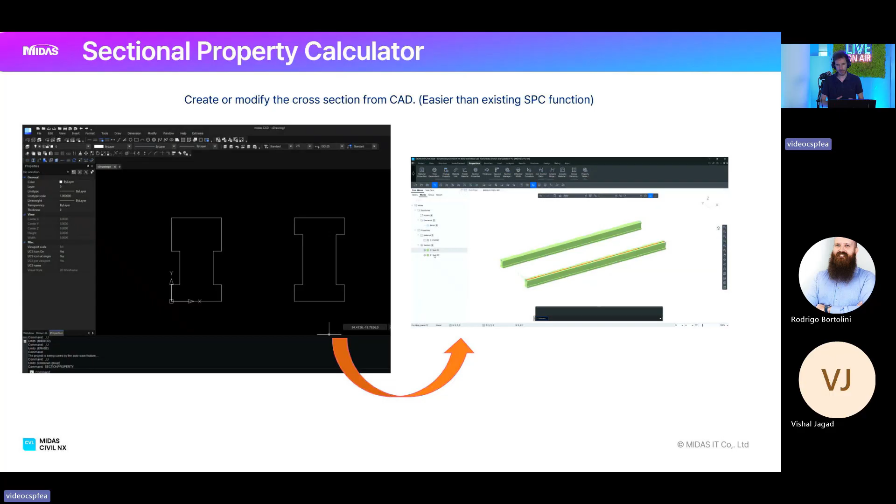Per esempio, qui disegniamo due sagome, e si possono calcolare le proprietà meccaniche di queste due sagome in questo strumento attraverso un comando che si chiama Sectional Property Calculator. Si calcolano le proprietà meccaniche delle sezioni, si abbinano a due o più elementi BIM di Civil NX connettendoli tra di loro.

E poi se noi aggiorniamo queste forme, quindi in CAD aperto contemporaneamente cambiamo queste geometrie, contemporaneamente possiamo aggiornare le sezioni nel modello aperto in Civil NX. Molto interessante, molto, molto comodo.

E questa funzione funziona per le general section, concrete section, steel section, composite section e per le tapered section, quindi per tutte le tipologie di sezioni.

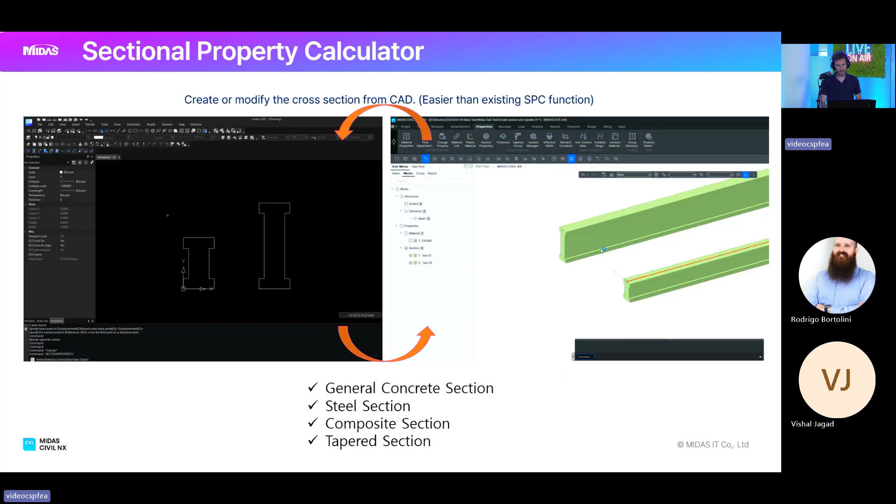Un'altra interessante novità è del nuovo GSD. È stata sviluppata la parte di precompressione, quindi è possibile introdurre dei cavi di precompressione sezionali. Sapete, il GSD è un verificatore sezionale di forme qualsiasi, e in più possiamo mettere i tendon, oltre che l'armatura.

Qui possiamo, adesso non c'è in questo disegno specifico, ma possiamo mettere sia l'armatura lenta che l'armatura di precompressione. L'armatura di precompressione ha le sue specifiche di materiale, ma in più ha anche il valore di precompressione, che possiamo introdurre completamente manualmente direttamente su GSD, oppure, essendo collegato a Civil NX, importiamo una sezione di Civil NX.

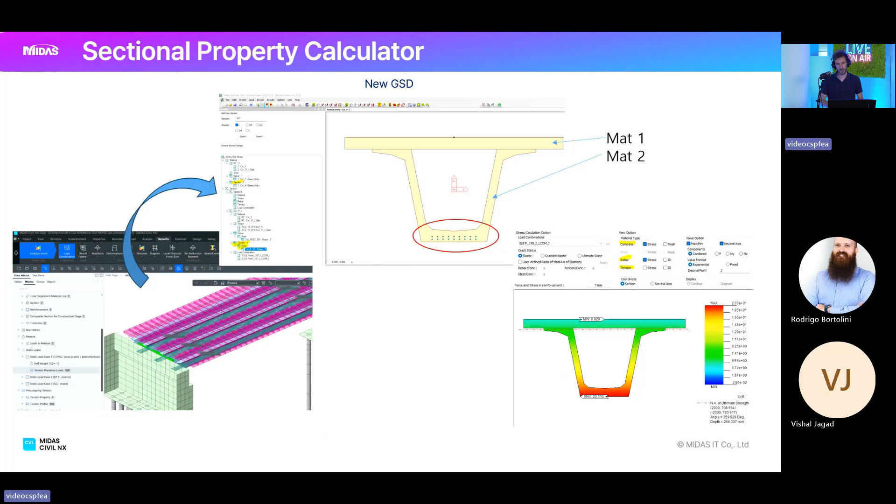In più, il nuovo GSD può sostenere due materiali concrete, quindi qui per esempio abbiamo un concrete per la trave e un concrete per la soletta, due materiali contemporaneamente presenti. È migliorato molto i tempi di soluzione delle verifiche, del check delle verifiche.

Come ho introdotto prima, sono migliorati i tempi in generale. Quelli del calcolo, essendo presente in questo momento ancora un solver tradizionale, i miglioramenti sono di circa il 10-15% nel calcolo, ma nella verifica sono migliorati molto di più.

Per esempio su questo test, dove c'è un modello scatolare a plate, non entro nei dettagli di quante combinazioni, carichi, eccetera, però diversi elementi plate con diverse combinazioni. Nel tradizionale Civil ci metteva 4 minuti, quasi 5 minuti, nel Civil NX 1 minuto e 38, quindi un miglioramento nei tempi di attesa del check molto migliorato.

Questo è molto interessante nel caso di verifiche di modelli a plate, però questo miglioramento dei tempi di design check è a 360 gradi, quindi anche sugli altri tipi di verifiche. Questo è un esempio che abbiamo preso perché è un tipico esempio dove i tempi si allungano molto, perché la quantità di elementi finiti in un modello a plate è di solito maggiore rispetto a un modello a frame.

Bene, adesso passiamo, fatta questa veloce introduzione, entriamo nel vivo della piattaforma API, sviluppata da Midas con una piattaforma di nuova generazione chiamata API REST, organizzata con un'interfaccia con il mondo della programmazione attraverso un formato chiamato JSON, che ha un formato di input e output con il quale poi si traduce nel modello di calcolo che tutti quanti conosciamo. Qui vediamo un esempio di interoperabilità con Python, Excel, VBA, Java, però oggi nello specifico vediamo una interoperabilità con Grasshopper.

First we will start with a brief introduction to what an API is and why it is important to use. We will discuss why Grasshopper is a fantastic tool for parametric modeling, and the main focus will be on integrating Midas Civil NX with Grasshopper.

So first is the synergy beyond Midas - what is the concept of data transfer with API? The first question that comes to mind is: what is API? API stands for Application Programming Interface. It is a set of specifications for a protocol that allows software applications to communicate and share data.

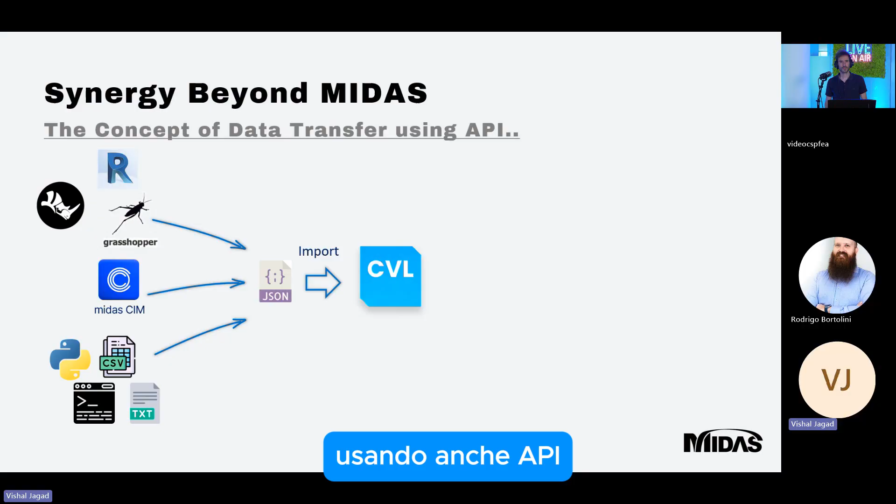In our case, Midas API allows us to communicate with platforms like Grasshopper, Excel, VBA, Python, Java with our Civil NX. So we can utilize the capabilities of different platforms with Civil NX, integrating different platforms using API. Also, we can export data from Civil NX to these platforms, so we can optimize the workflow accordingly.

So now the question comes: why do we need API? Till now we don't use API, and we are very comfortable without one. So why is this important now?

To answer that, let's see the challenges in bridge modeling. As a structural engineer, we know that initial planning and subsequent modification of a structure can be quite challenging. Sometimes we have to modify section dimensions, material properties, and bridge alignment. Implementing these changes can be quite challenging, requiring so much time and often repetitive work.

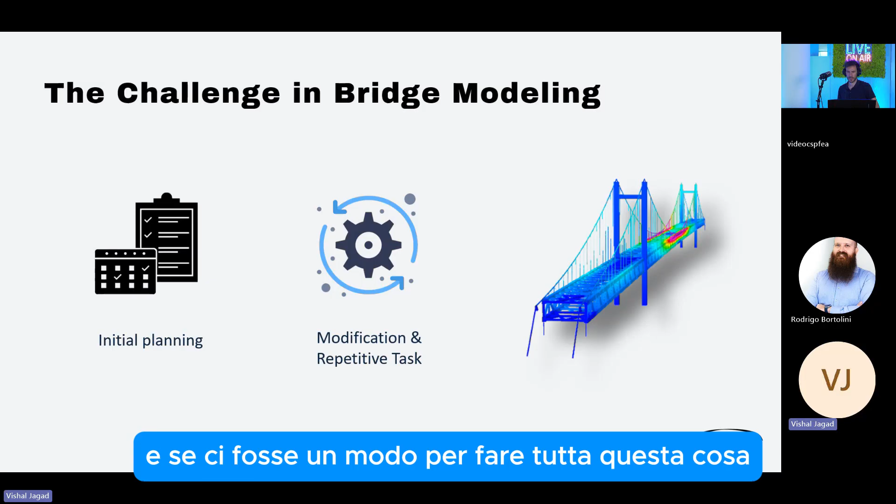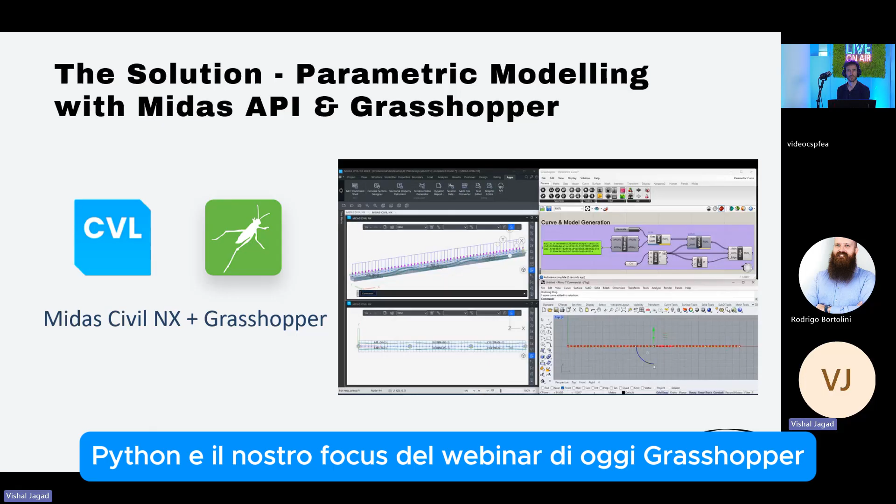So what if there is a way to make all these things far more flexible and efficient? That solution is Midas API. Using Midas API, we can seamlessly integrate Civil NX with different platforms like Excel, VBA, Python, and our focus of today's webinar, Grasshopper. This integration opens the door to parametric modeling and enhances overall productivity.

Let's see one video of how we can do that. In this video, we can modify the alignment very easily - we just have to modify it in Grasshopper and then implement that in Civil NX. With just a few clicks, we have updated the geometry. This is the example of how we can implement Grasshopper in Civil NX.

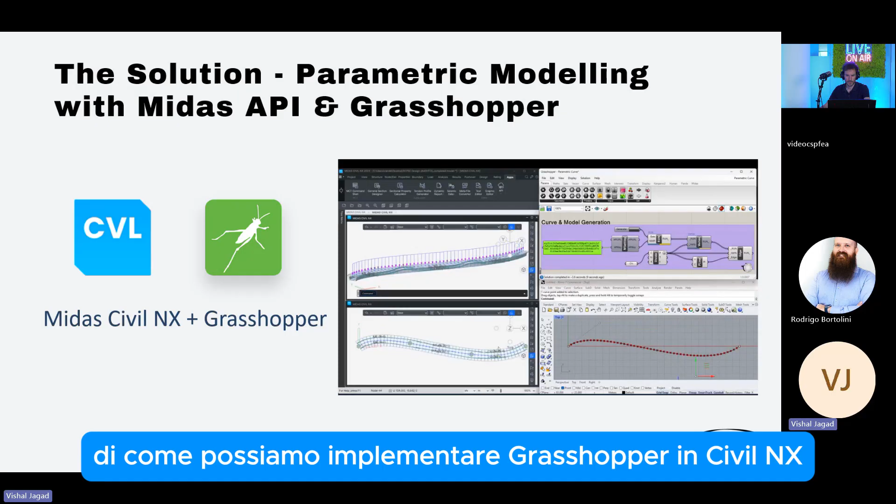So why Grasshopper? For those not familiar with Grasshopper, it is a visual programming tool built in Rhino 3D, popular in both architectural and structural engineering. It enables parametric modeling by letting users create geometry using logical relationships and adjustable parameters. This approach allows for rapid design iteration and real-time updates.

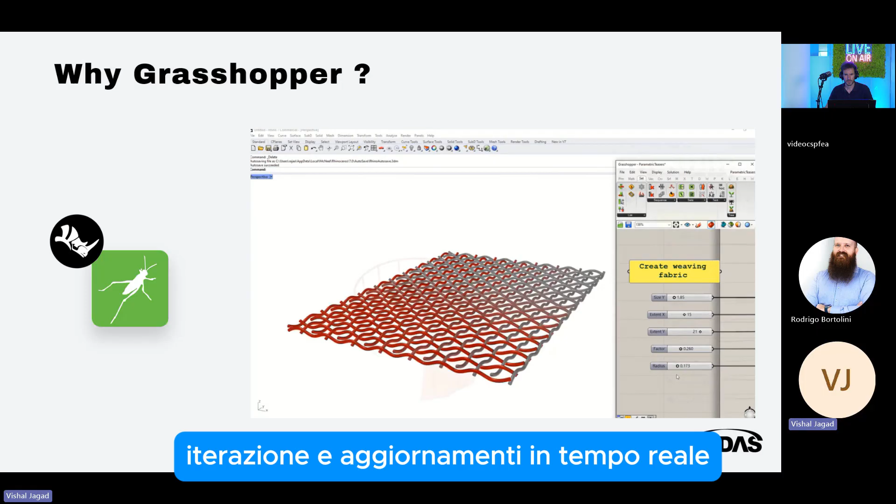So for simple or complex structures, we can create the structure in Grasshopper, and every parameter of that structure can be parameterized. We can see in this video that every parameter of the structure is parametric, so we can modify that in Grasshopper.

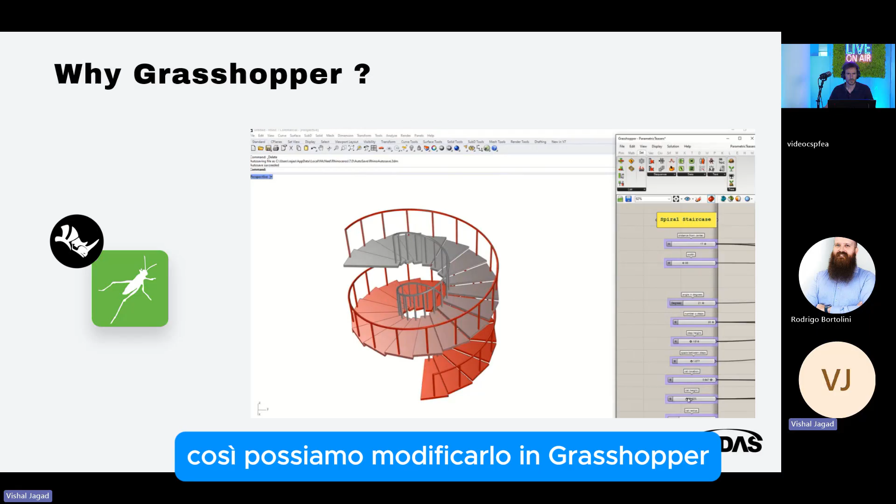Now let's see how we can use that to create a bridge structure. We will see the example of a truss structure - here is the truss bridge. We can modify the span of this bridge or the number of divisions of bracing, and also modify parameters like height or width. Each and every parameter we can increase or decrease. This is very useful when we have to make changes in our current bridge, and after modifying in Grasshopper, we can just create that bridge in Civil NX.

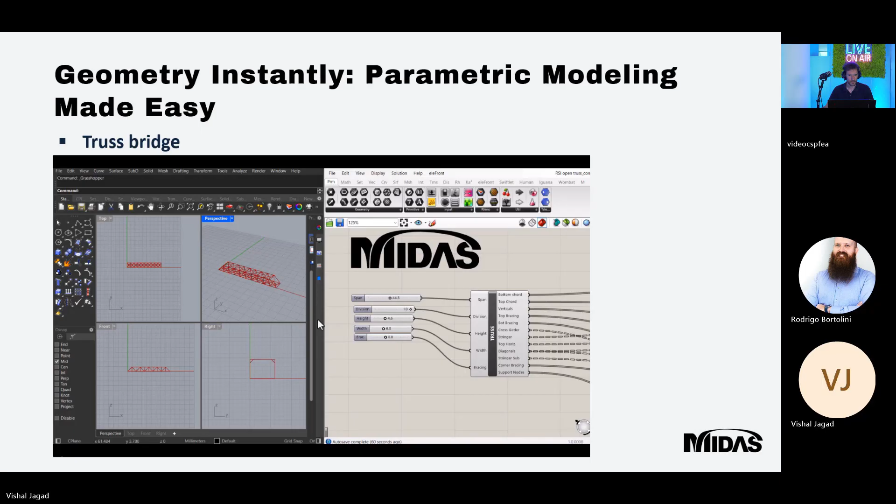Next example is of an arch bridge. We can see in this video that length we can increase, height also we can increase, and again width and number of divisions we can modify in Grasshopper itself. With just a few clicks, we have modified the full geometry of this structure. This is very useful when we have to make any changes in our existing structure - without it, we'd have to create the whole structure from scratch, which can take so much time. So this time can be utilized.

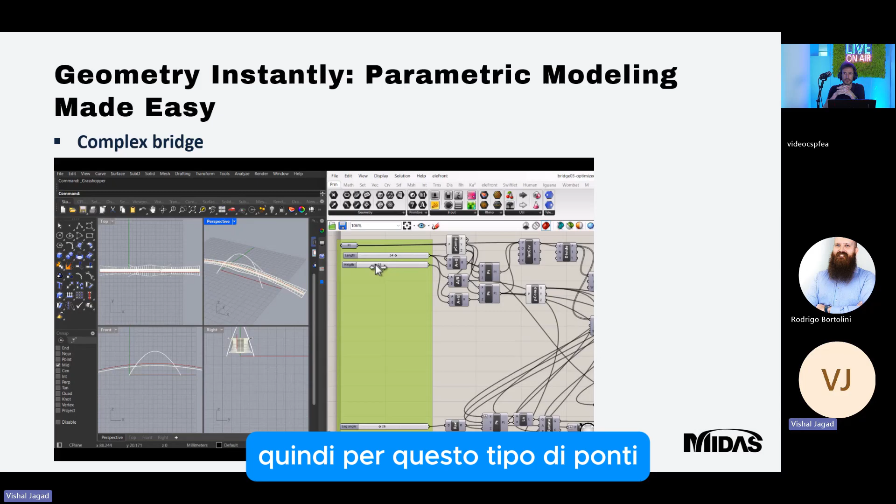Now, not just simple structures - in case of some structures where we have to implement so many dimensions, for example in this bridge, we can see there are so many dimensions such as length, height, and curvature. For this type of bridge, we can parameterize each and every dimension, such as angle or pipe diameter. We can see how easily we can modify the geometry without creating the structure from scratch - we can modify it in the existing Grasshopper file. Each and every parameter of this bridge can be modified, which is very useful when we have to test different types of geometry.

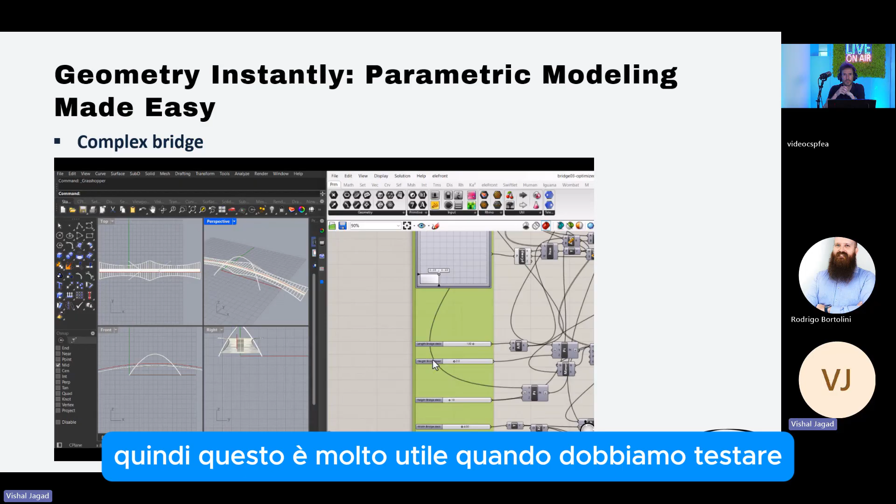So now let's see Midas plugin. To create the geometry that is created in Grasshopper, we have to use Midas plugin. Midas plugin is developed by Midas, officially available in the package manager of Rhino, and we can freely download it from there. After downloading it, we can see this type of tab in Grasshopper, the Midas tab.

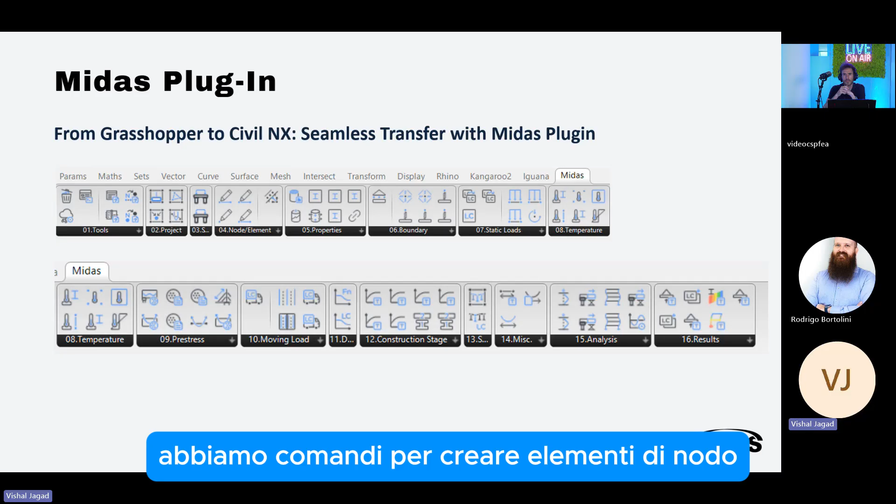In the Midas tab, we have all the tools available to create the bridge in Civil NX. For example, we have commands to create node elements, to apply boundary conditions, to apply static loads, and to apply construction stage and moving load, and to perform the analysis from Grasshopper itself into Civil NX, and also to extract the results from Civil NX. So all the necessary commands are available in the Midas plugin.

This command is arranged in a very systematic manner, same as available in Civil NX. For example, if you want to find the support, we can find it in the boundary command. And if you want to apply the self-weight, we can go into the static load and find that command. So this is very useful to find any command.

Now we will see one example of how we can create geometry in Civil NX using Grasshopper. First we will see how we can implement material, section, and create geometry, and also apply the support condition with this example. Let's see this video.

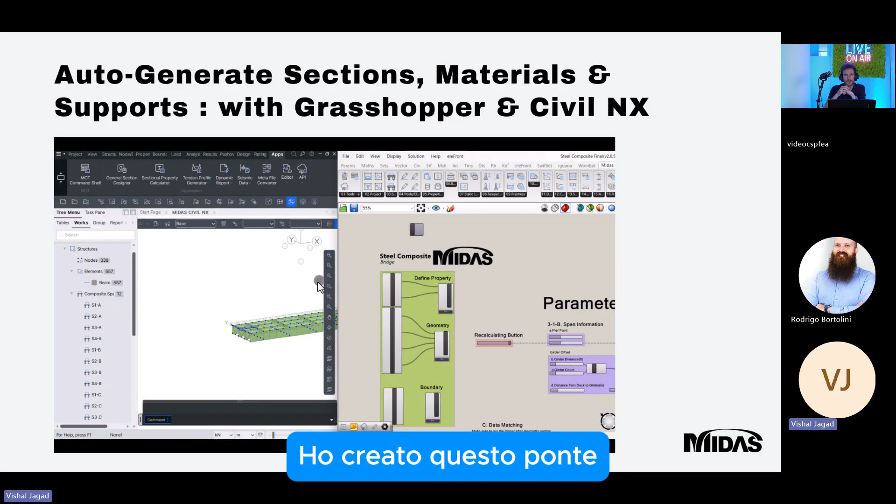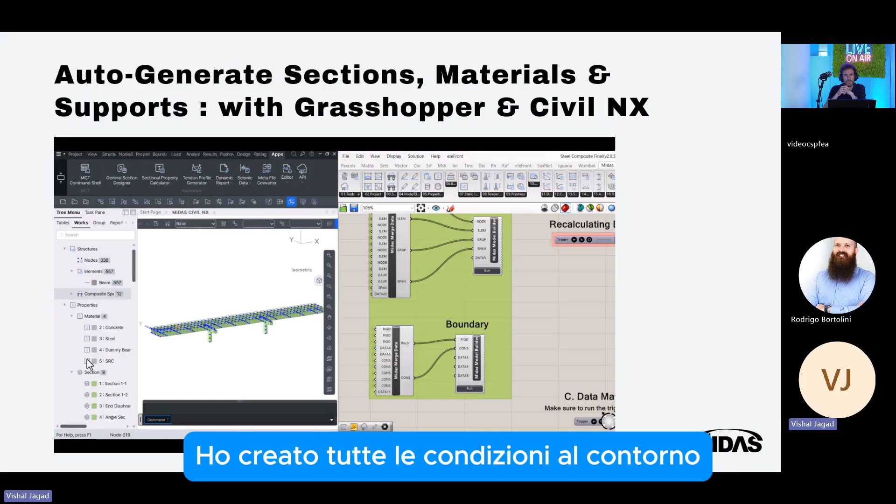With one click, I have created all the material and section. Then again, with just one click, I have created this bridge. Now I will implement rigid link and support conditions, and with one click, I have created all the boundary conditions, as we can see in this video.

So we have to create a Grasshopper template once, and then if we have any modification in the bridge, we can modify that in Grasshopper and run the command, and it will create the bridge in Civil NX. This is very useful in case of parametric modeling.

Now let's see an example of how to apply loads using Grasshopper. In this video, we can see that with one click, I have created material, section, and then geometry.

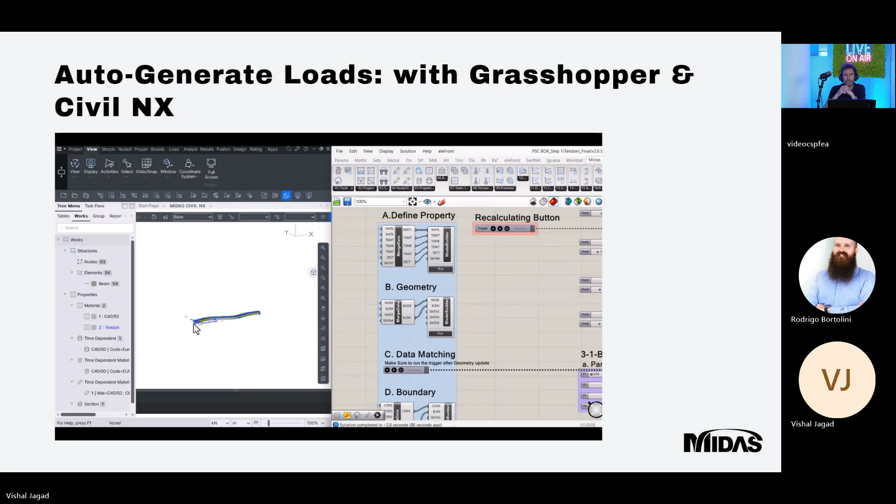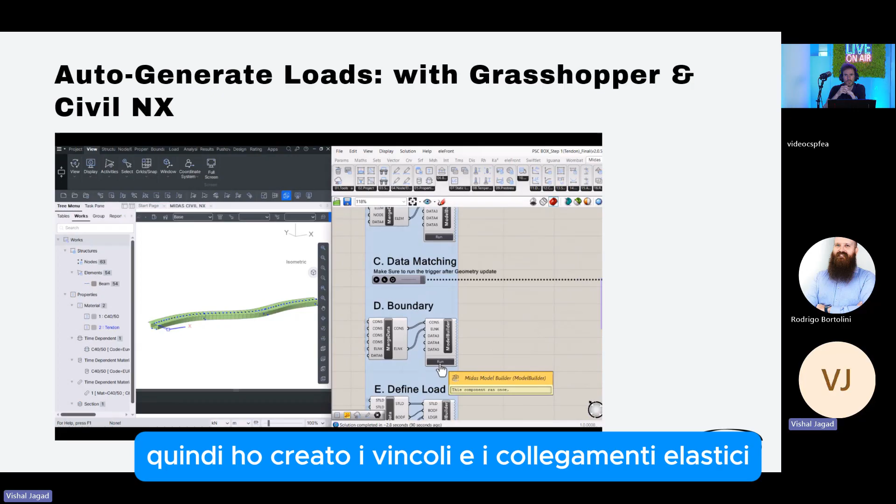Now I will apply boundary condition by executing this command. I have created the supports and elastic links. Now I just have to execute this command to define my static loads, and after defining it, I will assign it with one click.

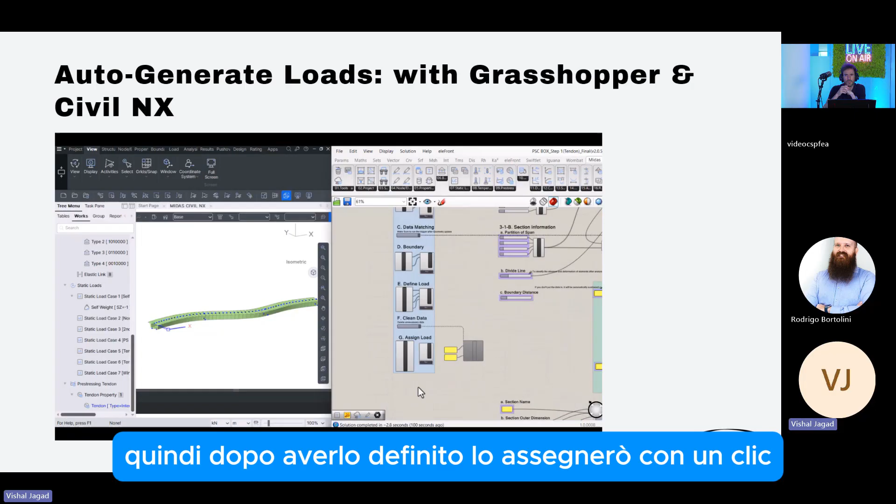We can see we just have to run this command. With one click, I have applied all the loadings. Now if I want to modify any load cases or any geometry, I can modify it in Grasshopper and then run this command again.

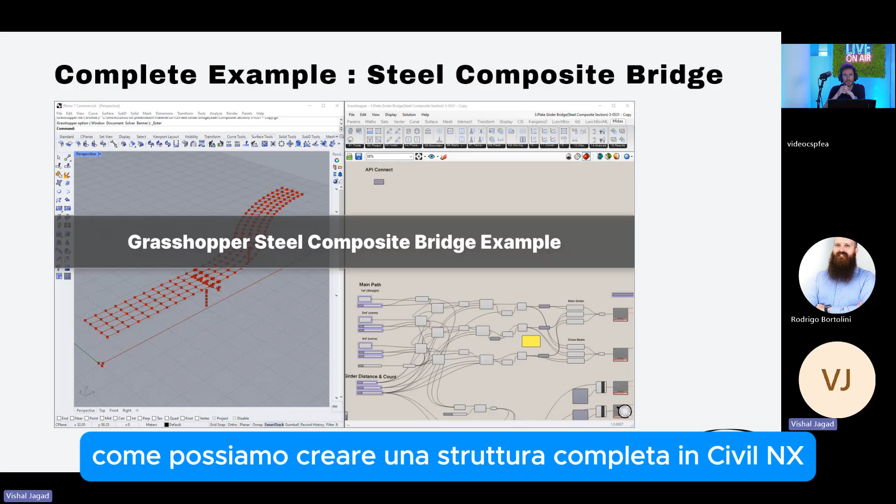Now let's see one complete example of how we can create a full structure in Civil NX. This is the example of a steel composite bridge. First we will see this example.

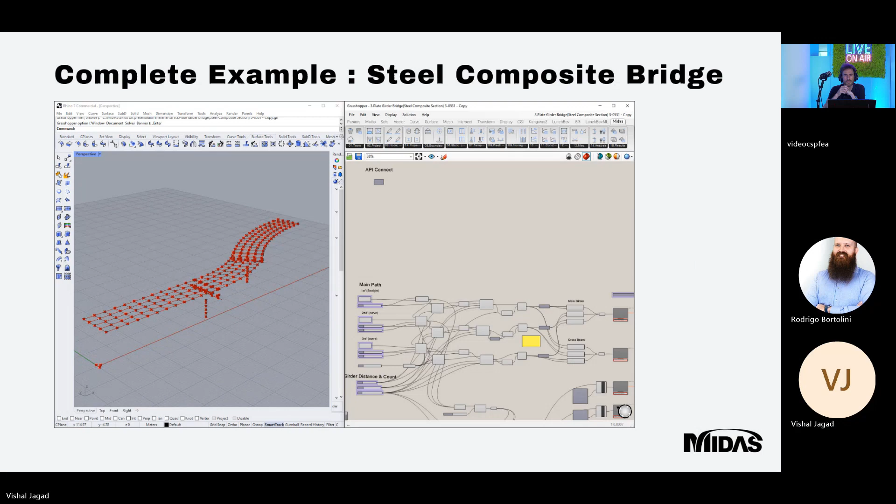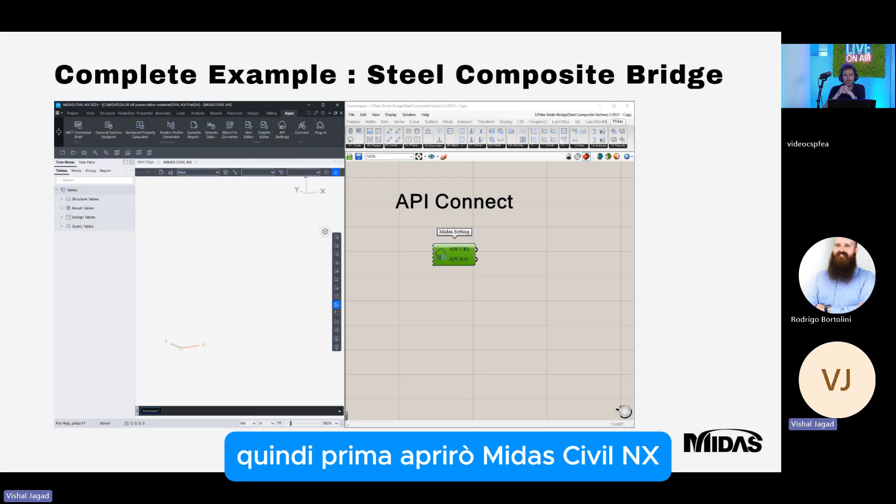Using the Midas setting command, we have to first connect the Grasshopper file with the Civil NX model. First I will open Midas Civil NX. In API settings, I will copy this base URL and API key. Then in Grasshopper, I will paste this base URL and API key. Now my Grasshopper file and Civil NX file are connected.

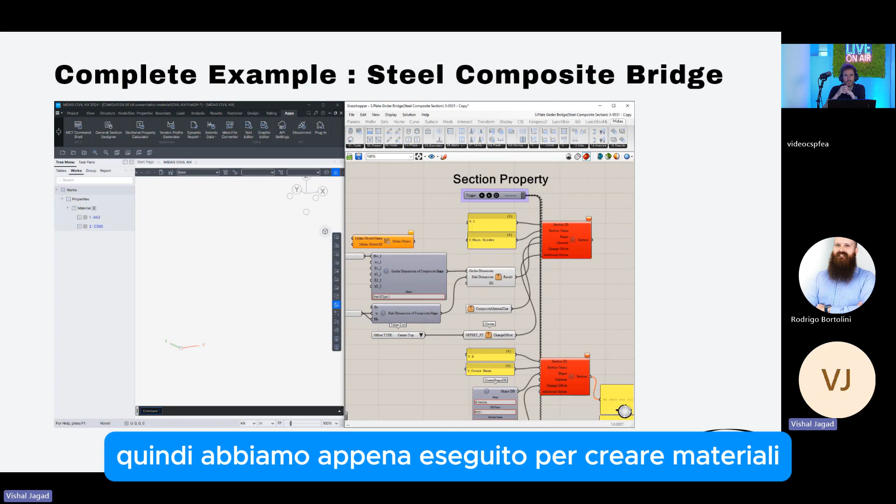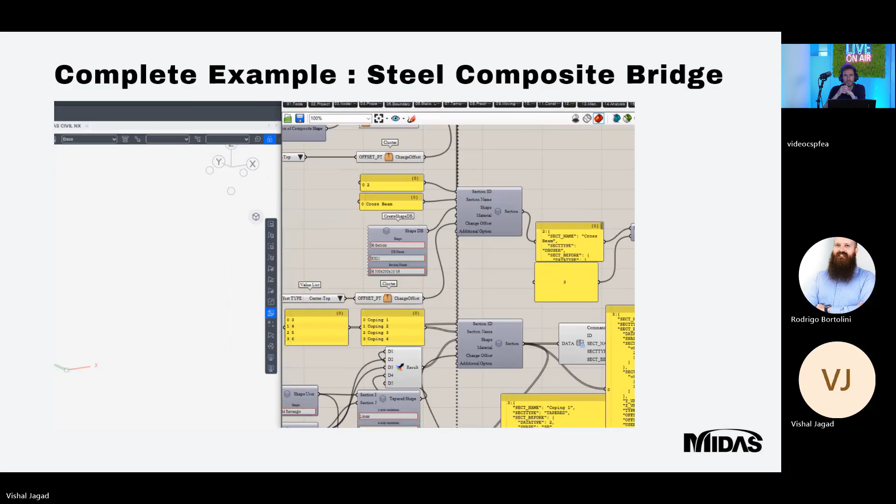Now I can execute all these commands. I have created all these commands, so we just have to execute it to create material, section, geometry, and loads in Civil NX. First we have executed materials, and we can also modify the grade of this material from Grasshopper itself. We can also modify the section type. Everything can be modified from Grasshopper.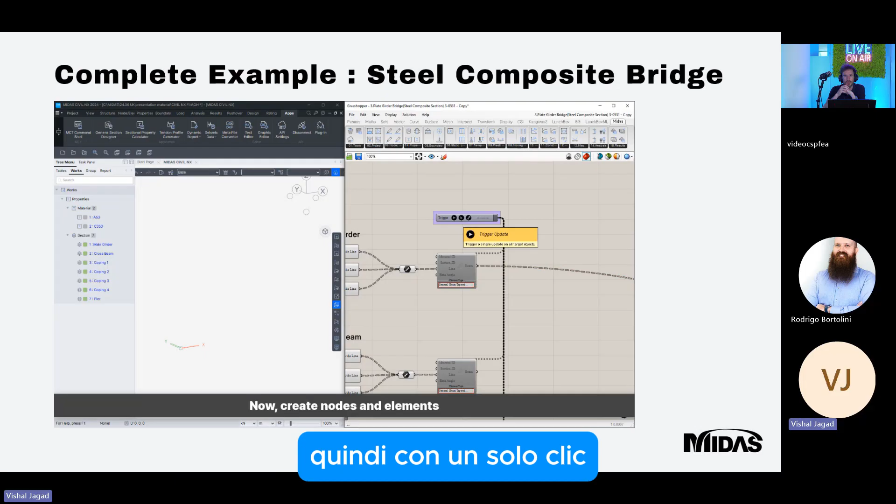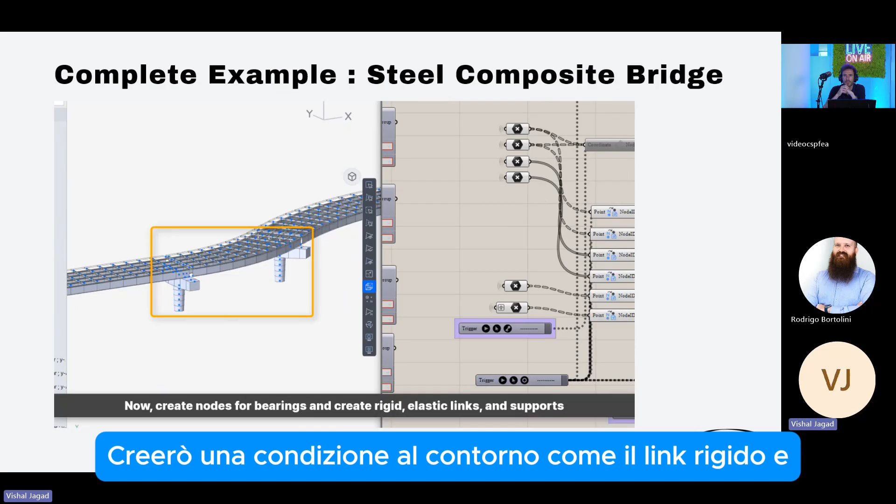Now we will create geometry. With just one click, we can create the geometry, and within a few seconds, I have created this steel composite bridge in Civil NX. Now we can also create the tapered section group, and with one click, we have created all the tapered section groups. Also, I will create boundary conditions such as rigid link and elastic link with just one click.

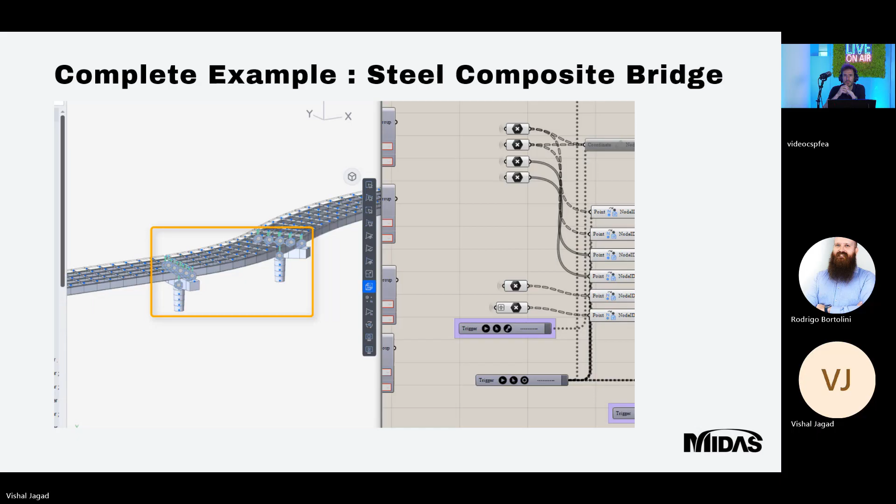So you can see all the boundary conditions are applied.

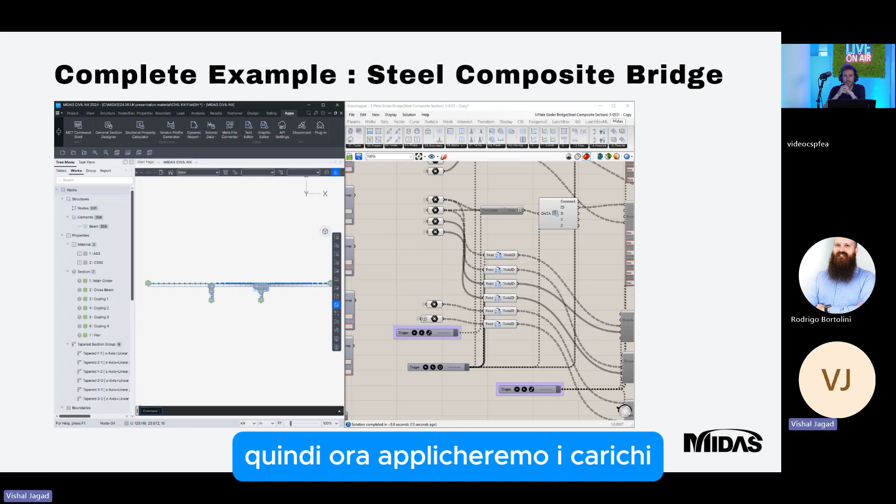Now we will apply the loads. First we will create the load cases. I have created the load cases and now I will apply these loads. So now I have to connect commands to execute this command. I have applied all the loads, as we can see in this video.

Now the last part is to perform the analysis. So we can just click on the analysis command to perform the analysis.

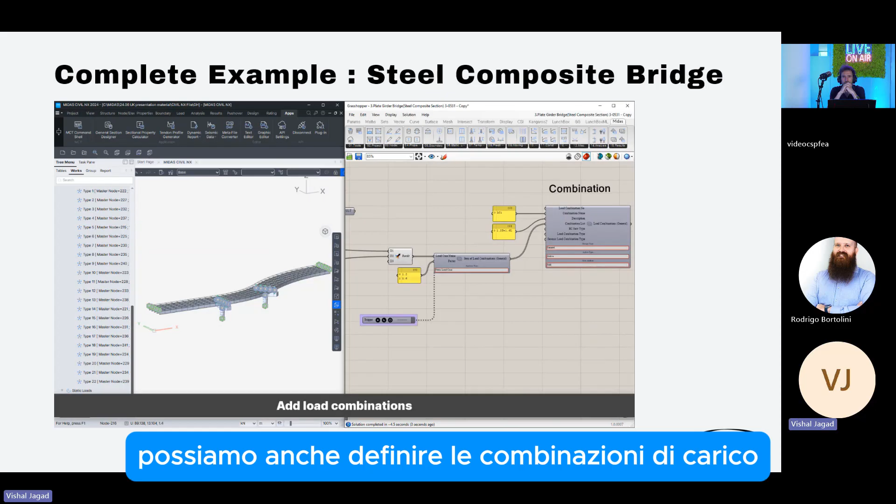After performing the analysis, we can also define the load combinations, as we can see in this video. Here I have created the load combinations.

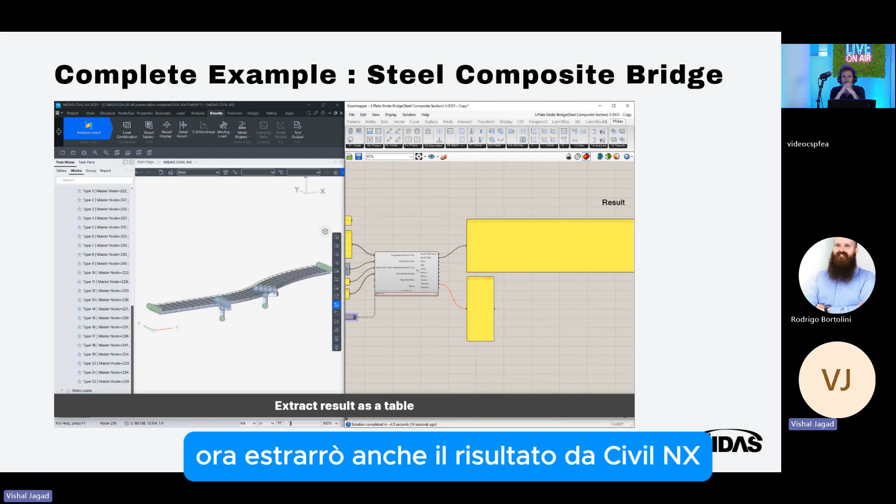Now I will also extract the result from Civil NX. So we can see we have extracted the result.

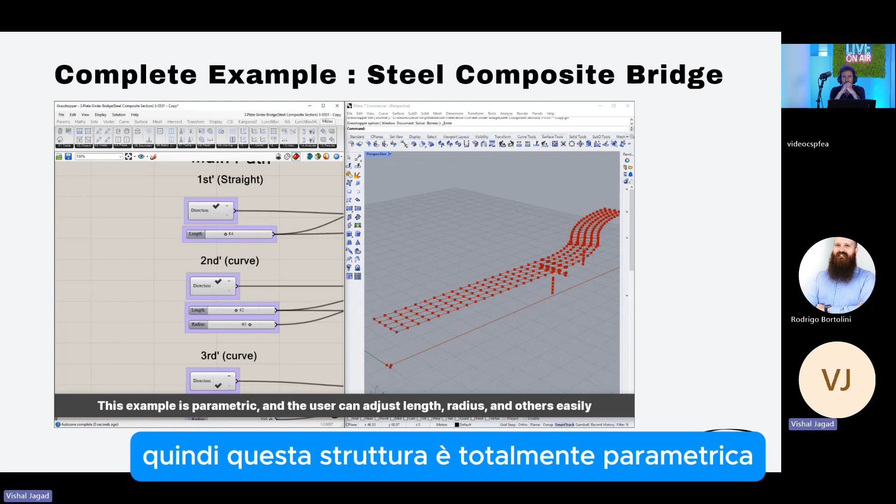So this structure is totally parametric. If we want to modify any dimension of this bridge, for example if I want to increase the span of the bridge, I can just modify it from Grasshopper and then I can create the bridge in Civil NX. So each and every parameter of this bridge is parametric. This is very useful when we have similar type of bridges. If we want to create the same type of bridges, we can just modify it in Grasshopper and then create it in Civil NX.

Now let's see one more example. This is an example of a PSC I girder bridge.

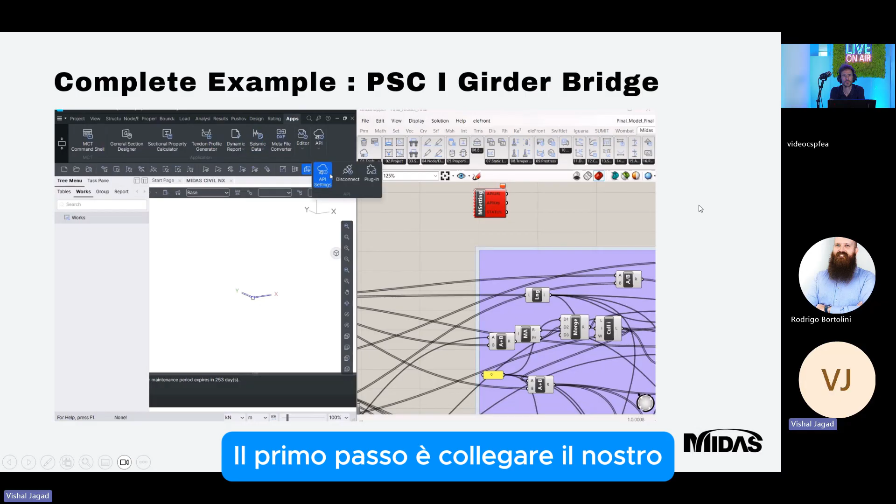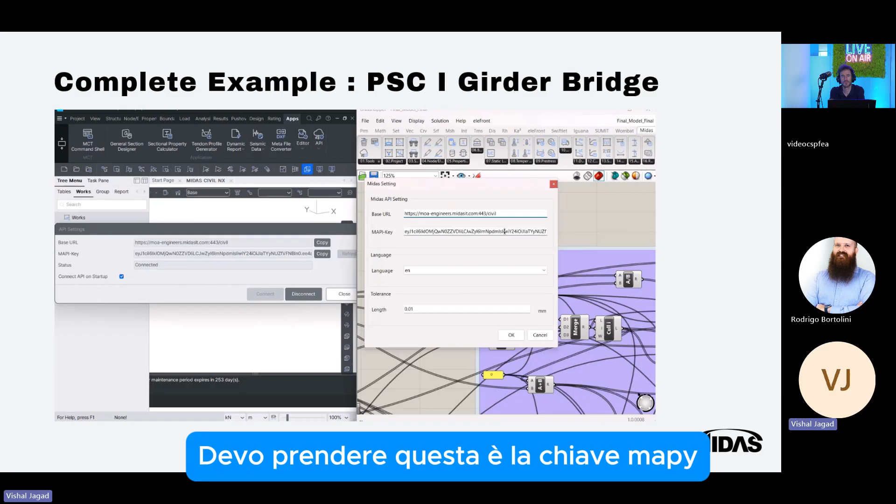Now, the first step is to connect our Civil NX file with Grasshopper. So I will just connect with the base URL and MAPI key. Here in Midas setting, I have to paste this base URL and MAPI key. So my current Civil NX file is connected with Grasshopper.

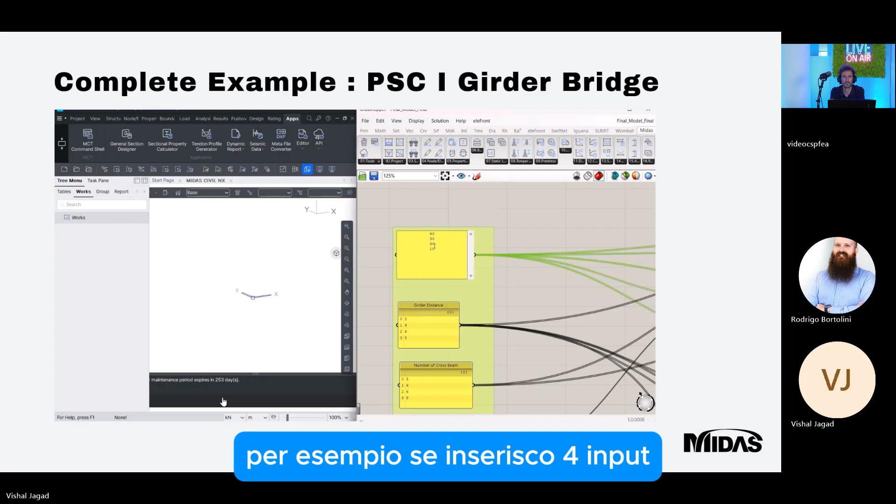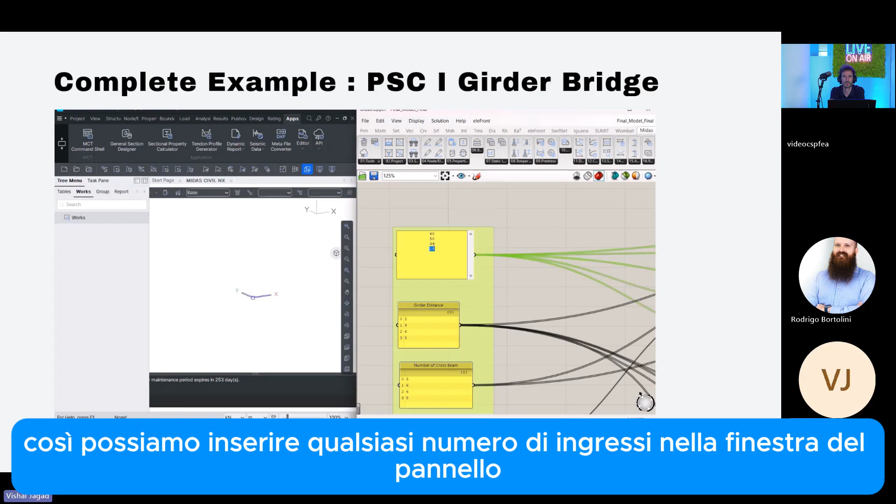Here we have to input our bridge length. We can input any number of span lengths. For example, if I enter 4 inputs, it will create 4 spans. But if I want to create 10 spans, I have to input 10 in this panel box. So this total input is totally parametric, and we can input any number of inputs in the panel box.

Here we can input the girders, the number of girders we want, and the number of cross beams. And also this is the part to input for the substructure. Then to execute that, we have to just run all this command.

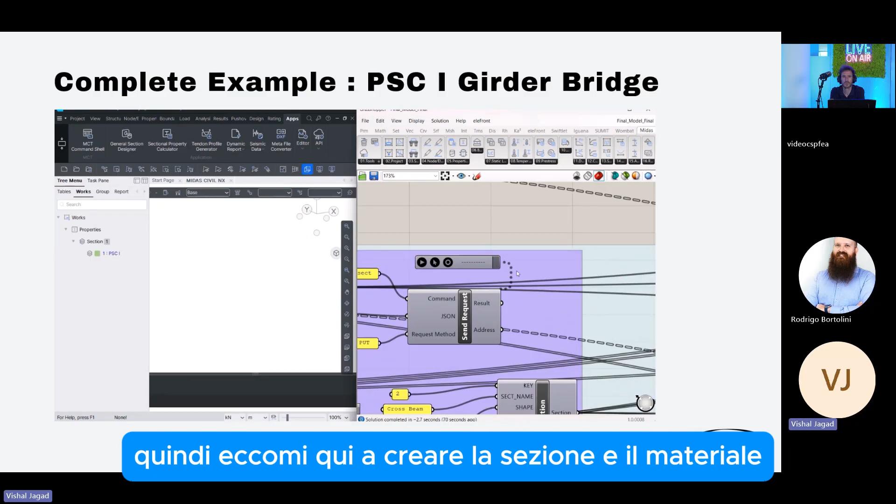So here I am creating the section and material. I have to run this command to create that. So with one click, we have created these sections and material.

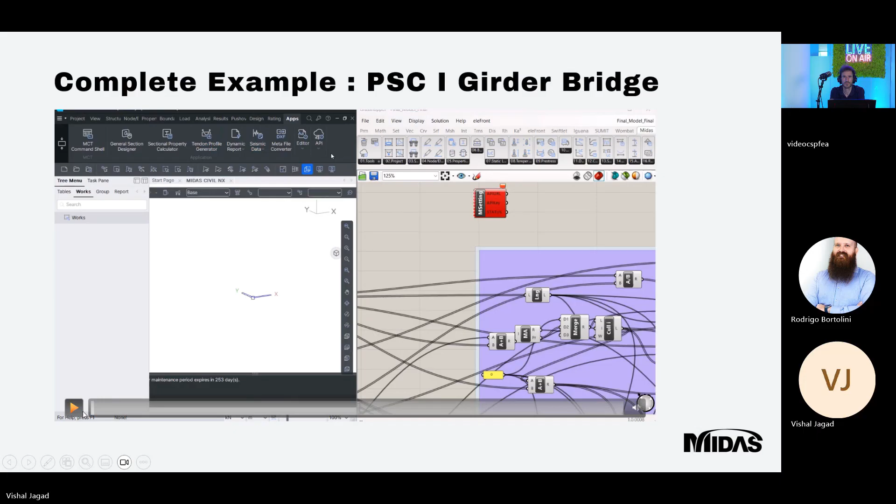Now I will create the bridge geometry. So here, after creating the bridge geometry, we can see that this bridge geometry is created, and the dimensions are the same as what we entered initially in Grasshopper: the first 4 spans are 50 meters and 40 meters, and the last is 30 meters.

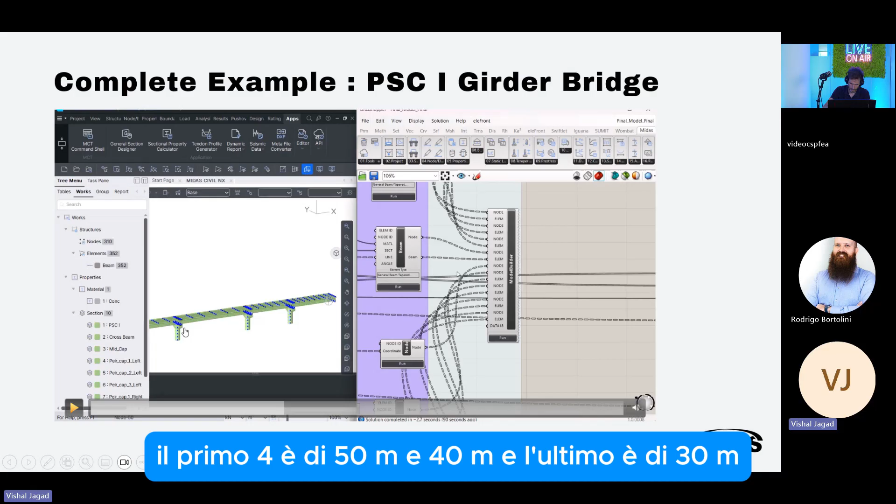We can see this here. So if you want to increase the number of spans, we can just input it here in Grasshopper, and then we can execute all this command.

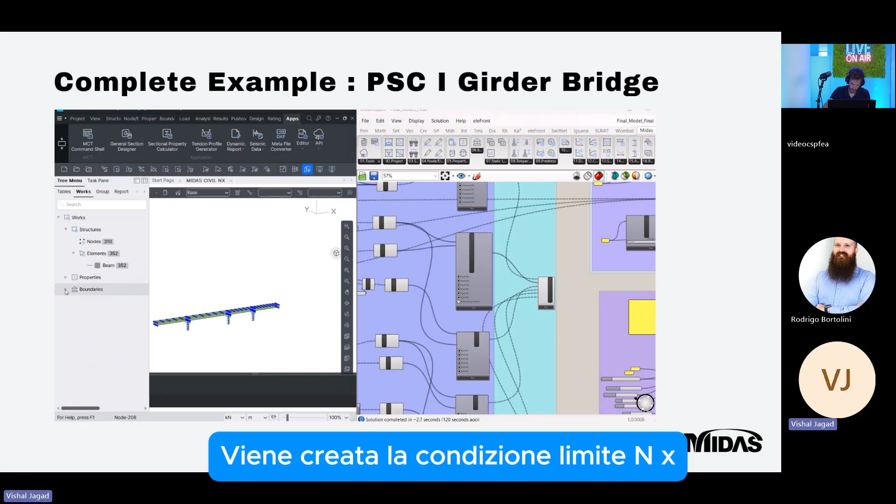Now here we have the option to create the support conditions. I will run this command to create the rigid link, elastic link, and support conditions. So we can also see in Civil NX that the boundary condition is getting created. This is the supports that are applied, these are the elastic links, and these are the rigid links.

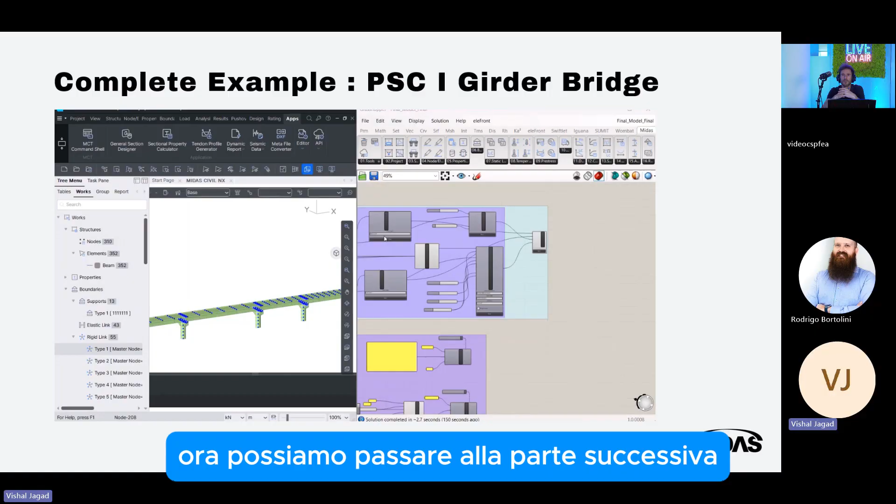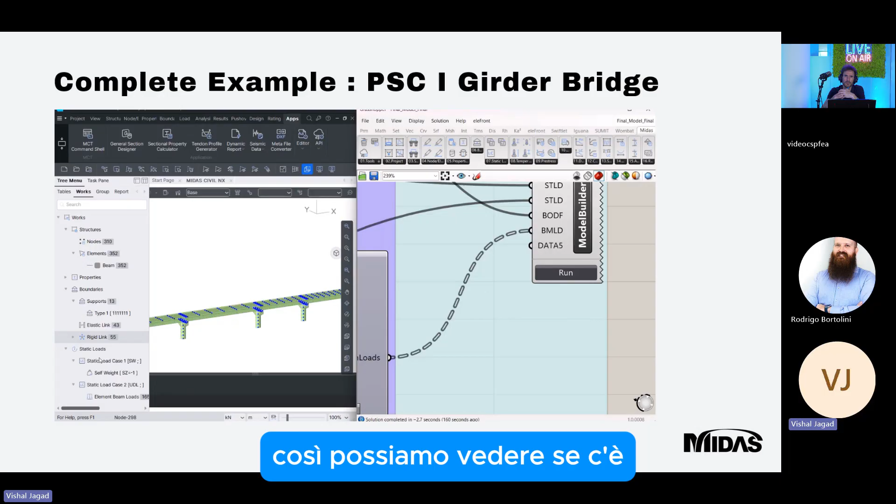Now we can move to the next part to create the static load cases. Again, I will run this command and it will create the static load cases and apply the static loads. So we can see that self-weight and UDL load is applied in this bridge. We can also display those results. Also, if I want to modify any value of this load, I can just modify it in Grasshopper and run this command again.

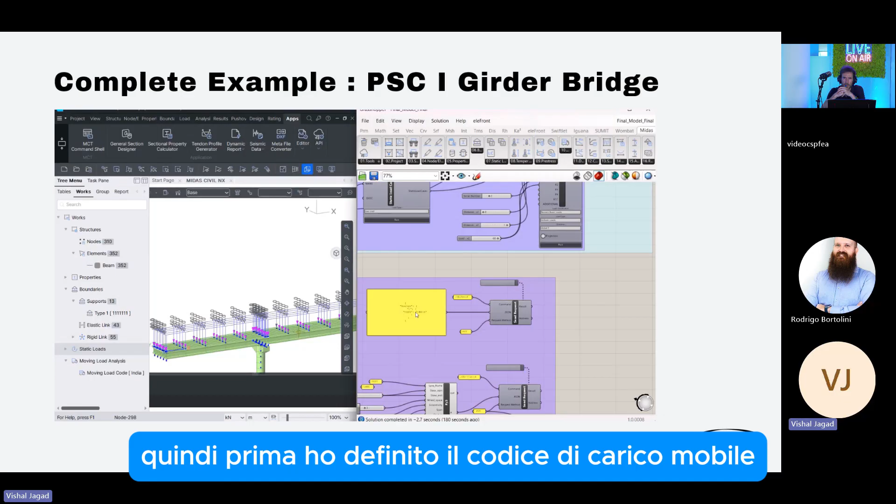Now we can also create moving load cases. I will execute all this command to apply the moving load. First I have defined the moving load code, and then I will create the traffic line lane. Here we have created the traffic line lane in this bridge.

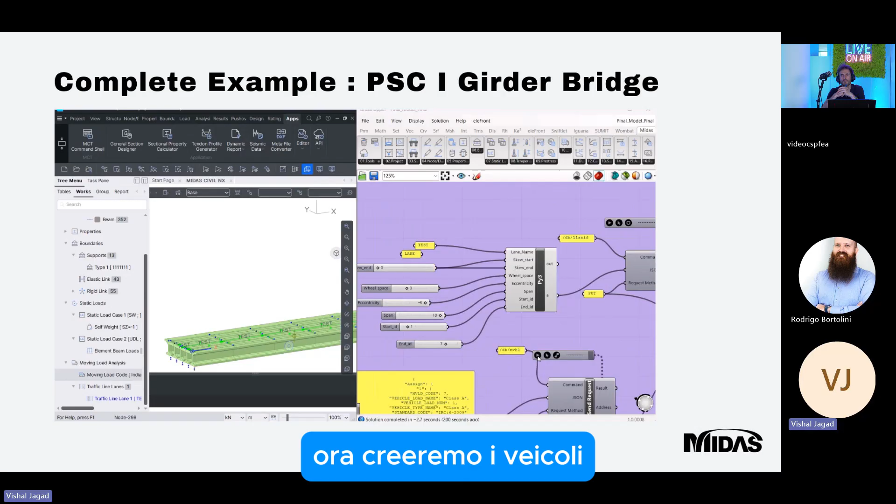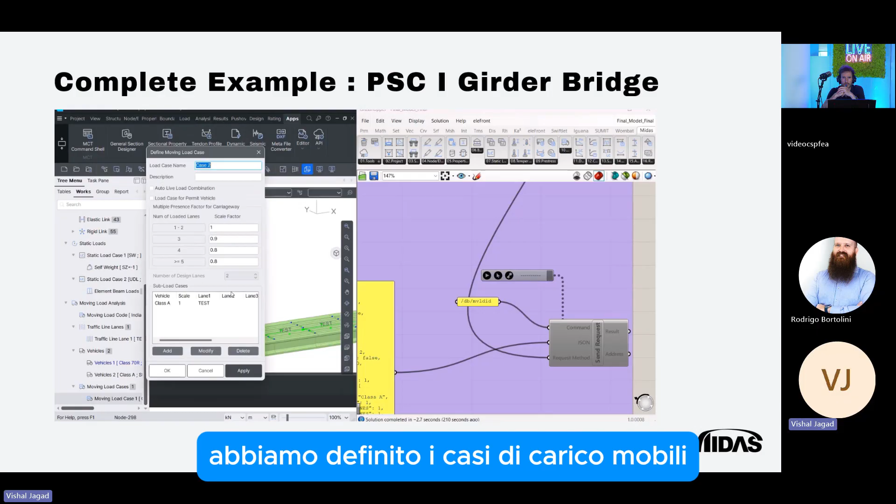Now we will create the vehicles. Now we will define the load cases for the traffic line lane. We have defined the moving load cases. After defining all these things, we can just click on the perform analysis command.

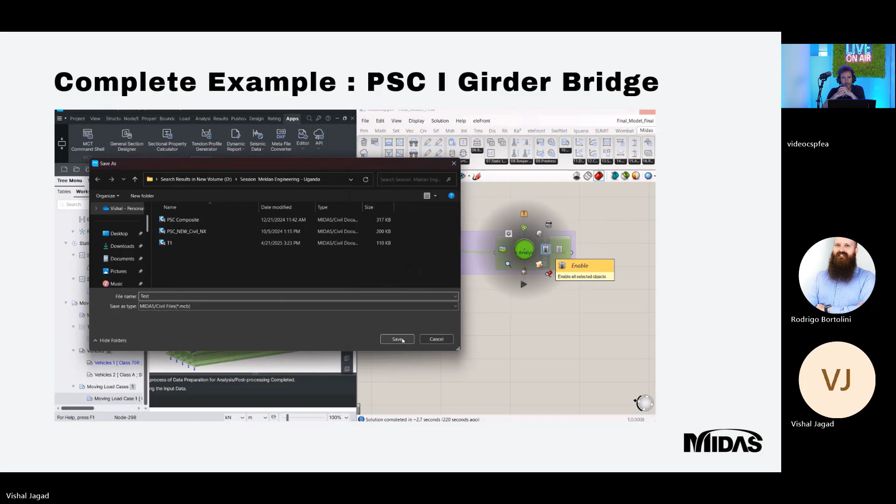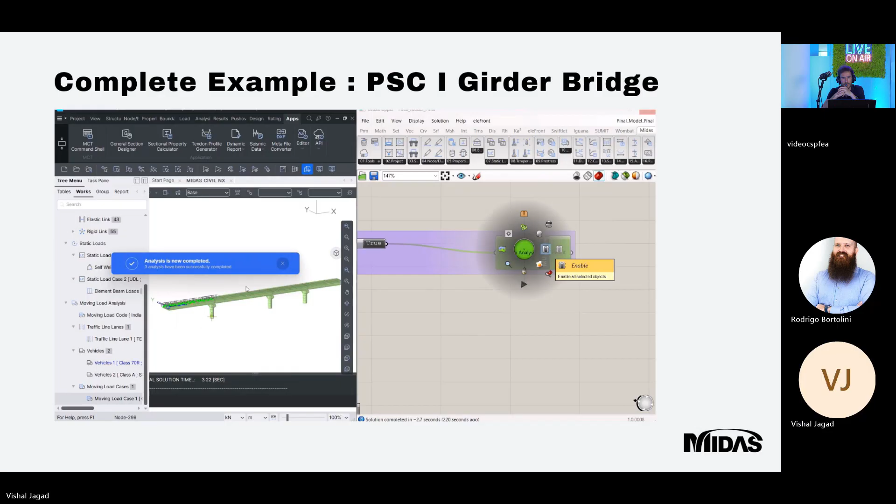So here I have inputted the name, and now we will perform the analysis. So now we have performed the analysis from Grasshopper. So this is how we can create any parametric bridge in Grasshopper.

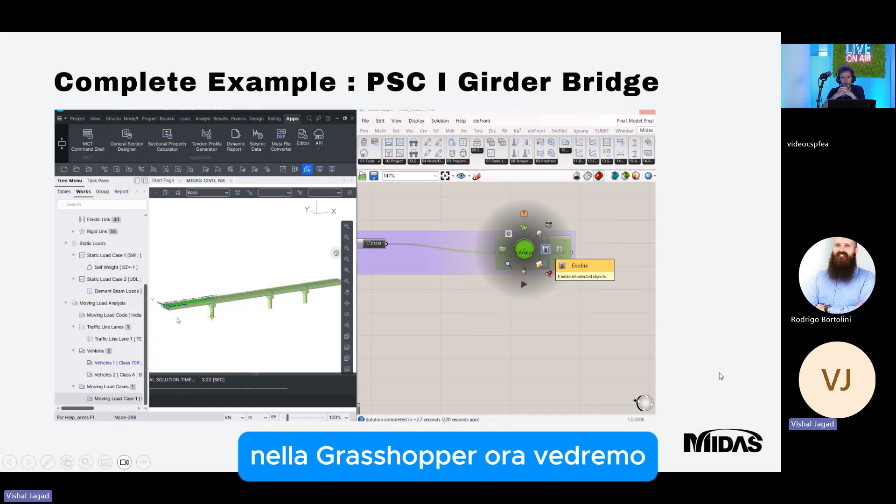Now we will see we can also update the alignment of any existing structure. So we can not only create the structure in Civil NX, we can also update any existing structure from the Grasshopper.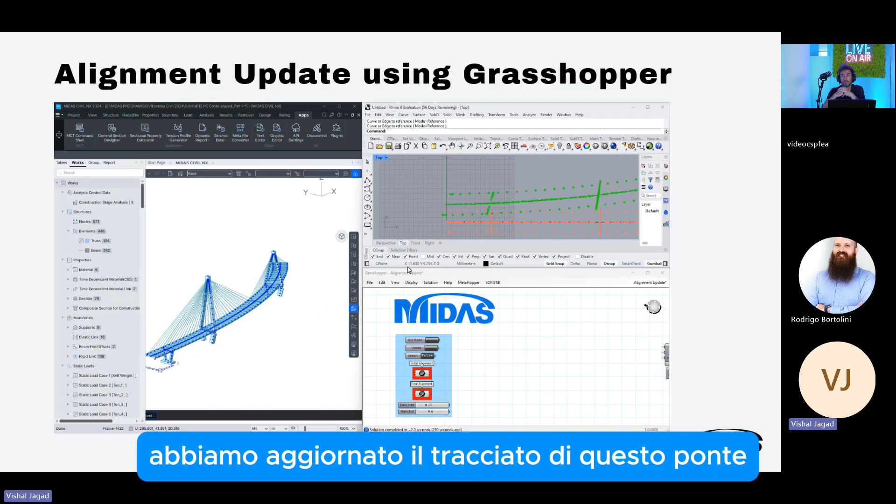We can also update the skew angle. So if we see this bridge from the top, we can see that this skew is updated.

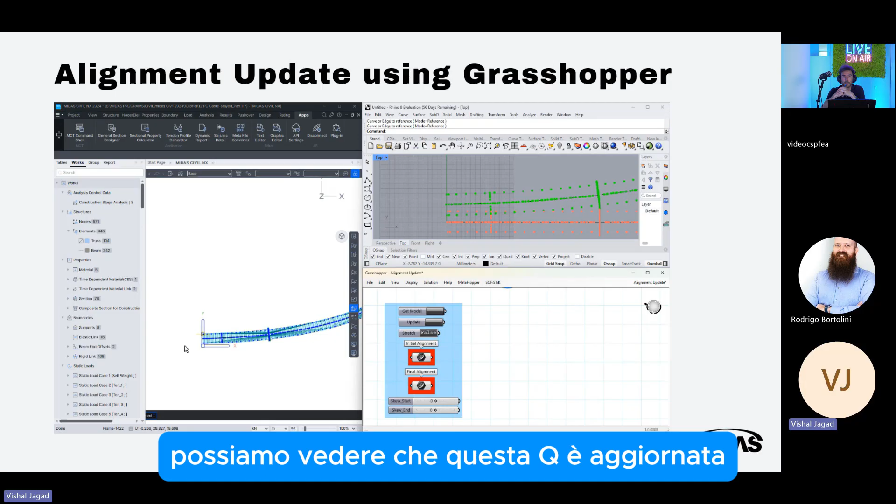Now if we see for the composite bridge, first we update the skewness. First I will click on get model to get the current alignment. Here we will link with the initial and final alignment.

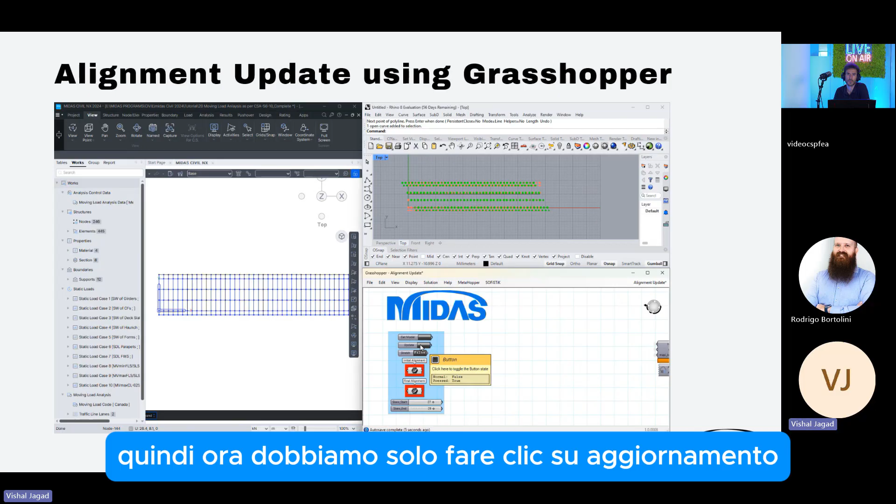Now we will update the starting skew angle and ending skew angle. So now we just click on update, and we can see in Civil NX that we have updated the skewness of this bridge.

So here I am updating the geometry in curvature. I will update this alignment to curvature, modify the skewness, and just click on update. So we can see in Civil NX, we have updated the alignment.

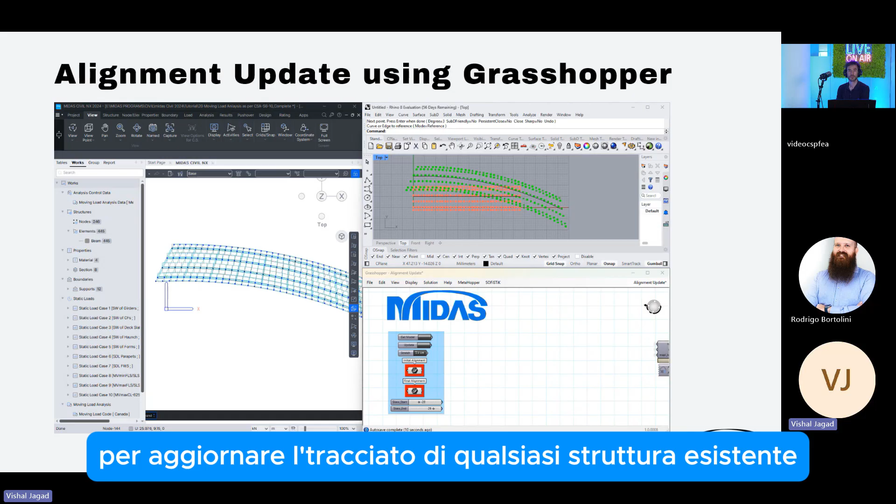So we can also use this option to update the alignment of any existing structure. This is very useful when we have a similar kind of bridge, and you just have to update the alignment.

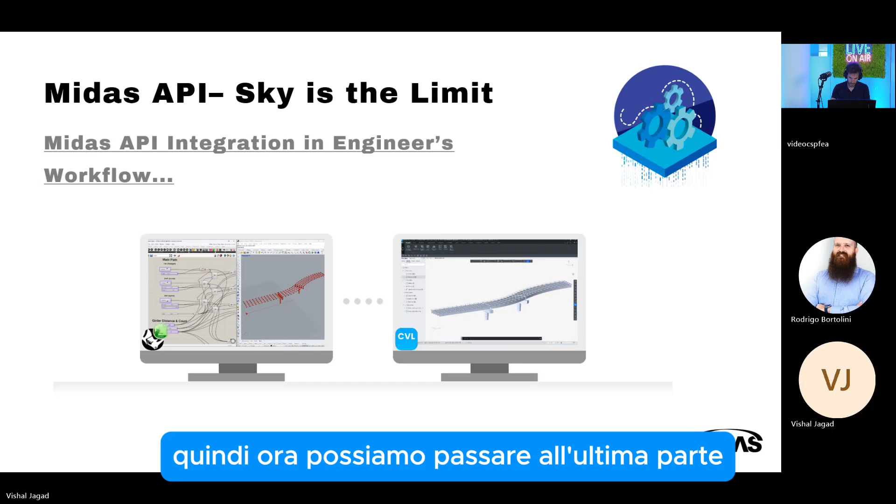So we can say with Midas API, sky is the limit. In summary, using Midas Civil NX API, we can leverage the parametric modeling capabilities of Grasshopper, optimize our workflow, and improve our efficiency for bridge creation. So now we can move to the last part, which is connect more and create more. Thank you.

Thank you, Vishal. What can I say? Very interesting. It's very powerful. We saw how it works, but also we saw some examples of how to insert Grasshopper and Midas Civil link together inside a hypothetical workflow in a company.

Let me share again my PC. Sorry. Okay. No. No. Okay, maybe you can see again my screen.